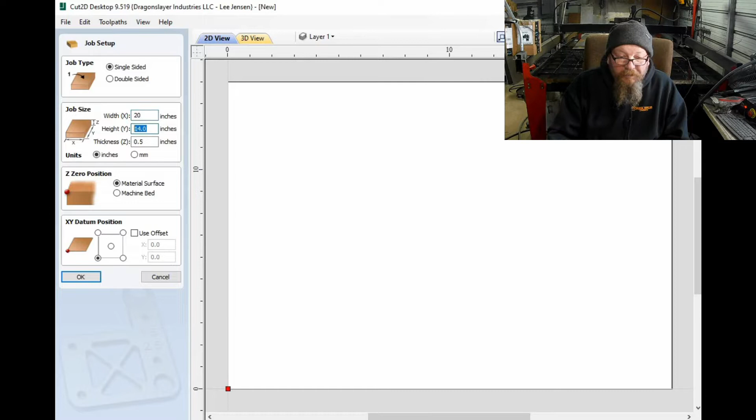What I'm going to do, we're going to make our layout just a 20 by 20, and our piece probably isn't going to be near that big, but what that does is that makes the center 10 and 10, which makes it real easy.

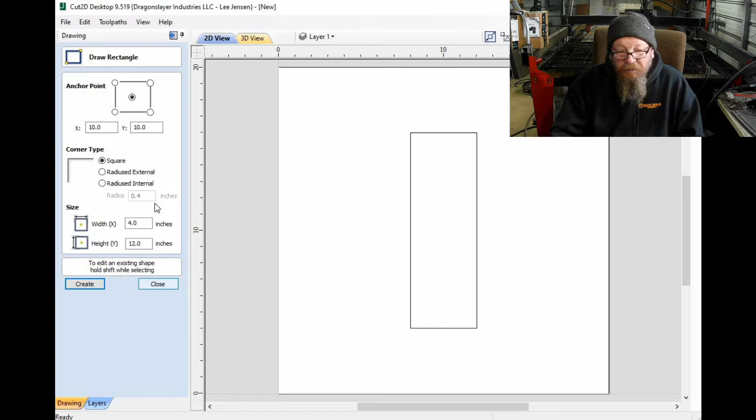So I know my piece of plexiglass is only about 4 inches wide at the widest part, and what I did there is I'm centering this rectangle up, so I'm going to make the width of the rectangle 4 inches wide. The plexiglass is 12 inches long about. It's got some stuff on it that needs to be cut off. So we're going to start with that rectangle right there in the middle.

And then we will find us some text, I want just a pretty basic text, maybe just an Arial. I'm going to go with Arial Black.

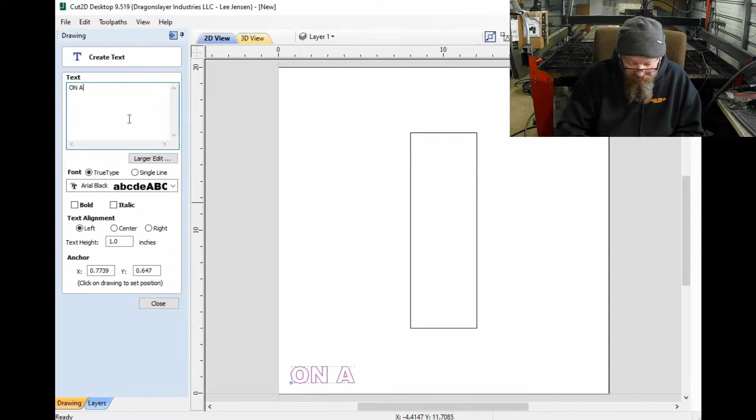So here we go again, just get that text out of there. So, yeah.

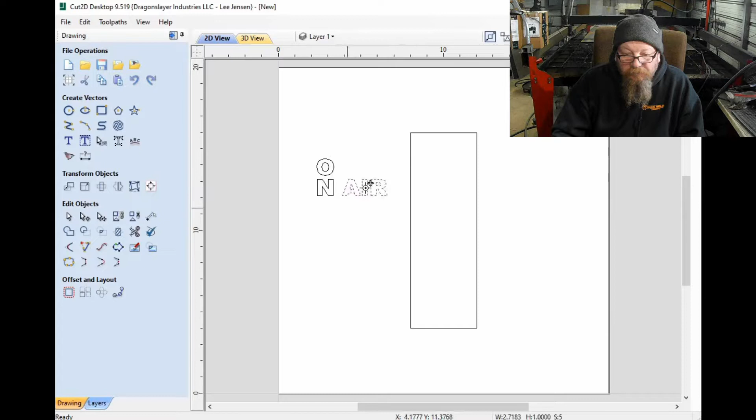Turn the text into a vector so that we can deal with it a little easier. Just trying to snap to the center there.

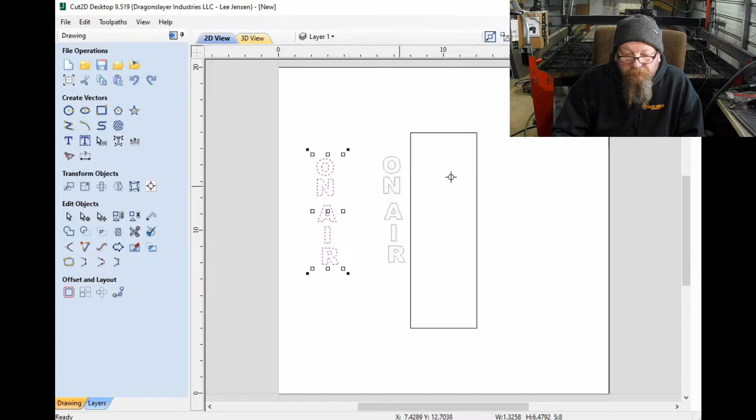And there may be some kind of lineup, something on here. More similar to Inkscape, but I don't know.

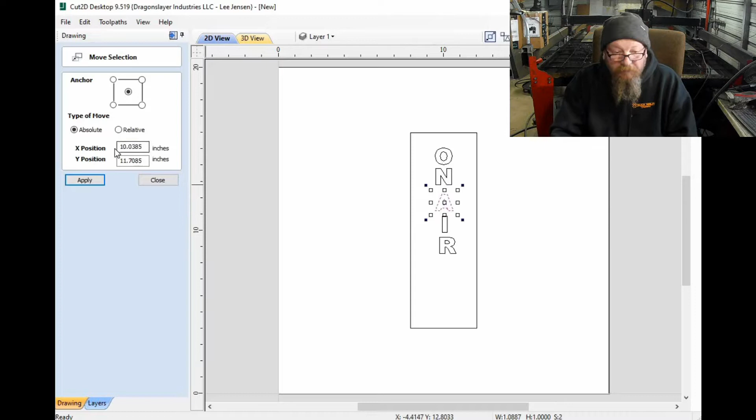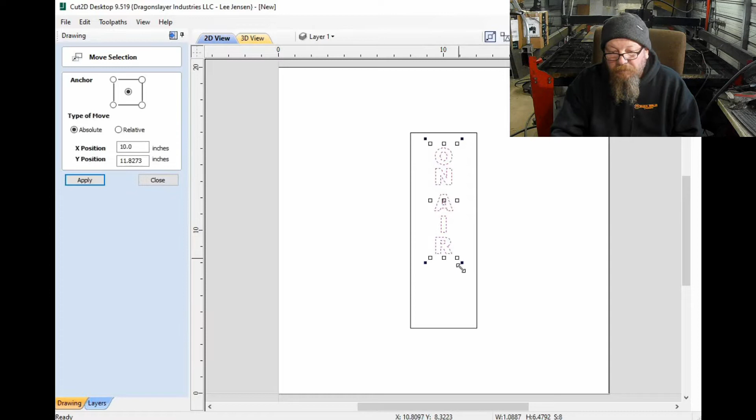Just centering them all up at 10. We'll make it all a little bigger. I like that a little better. Move it all back over to 10.

This is only going to make it smaller one way. We're almost dead center top to bottom, but we'll fix that.

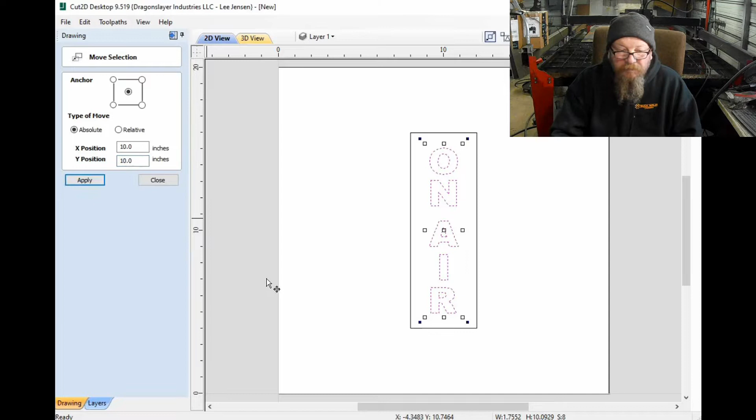Okay, so I like that. Actually, I want to move this up just so there's a little more definition between 'on' and 'air'.

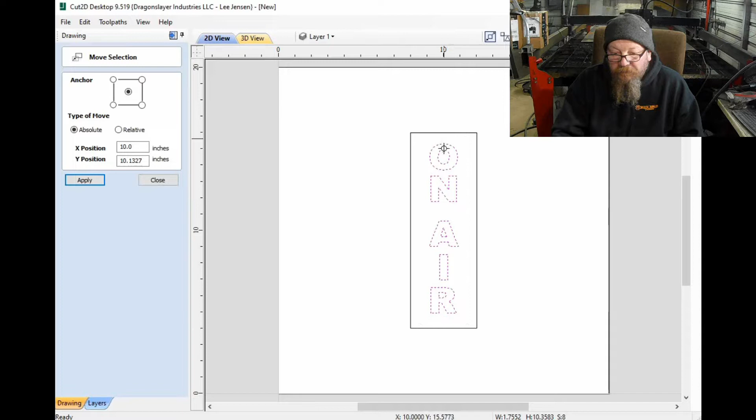Back down 10. So we're 10 and 10, we're perfectly centered. Now we gotta make sure the centers of this stuff doesn't fall out.

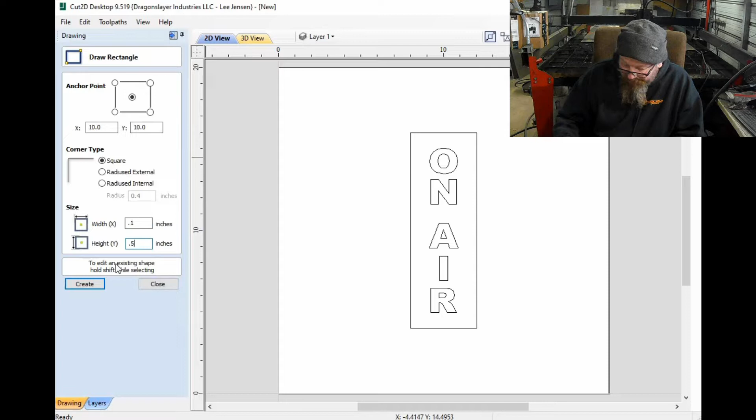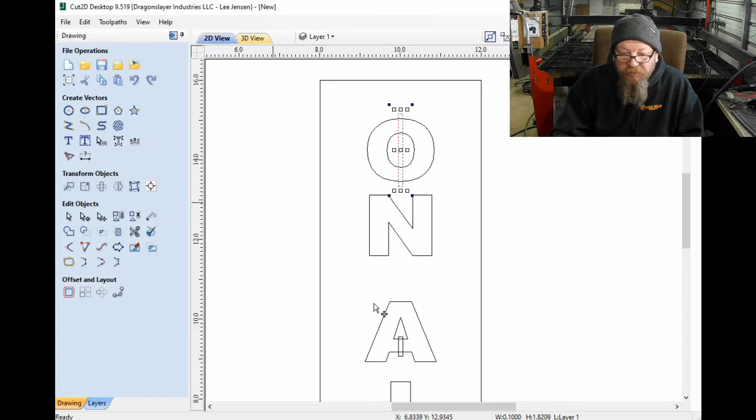So we're gonna tag a few of these drops in. What I'm doing is making sure that the center, we have to tag it in, bridge it across. And that one's fine there.

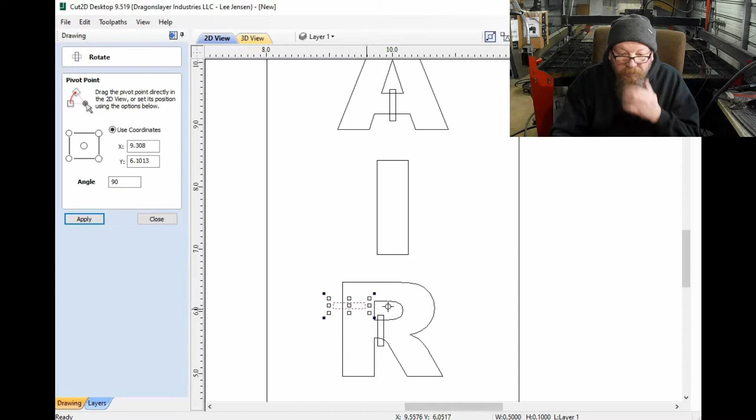So we'll go up here in a minute. Try not to use the keyboard shortcuts because you can't see those. Stuff will just start happening.

So we're going to center this up. Select our one that we want to move first. Okay. We're going to center this one up to that.

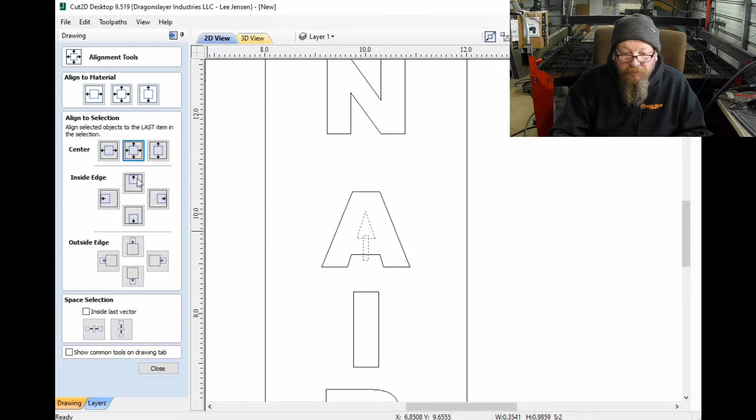Side to side. We're going to center this square to there. Center this one to the top. Okay. Now we'll come back and cut all these out.

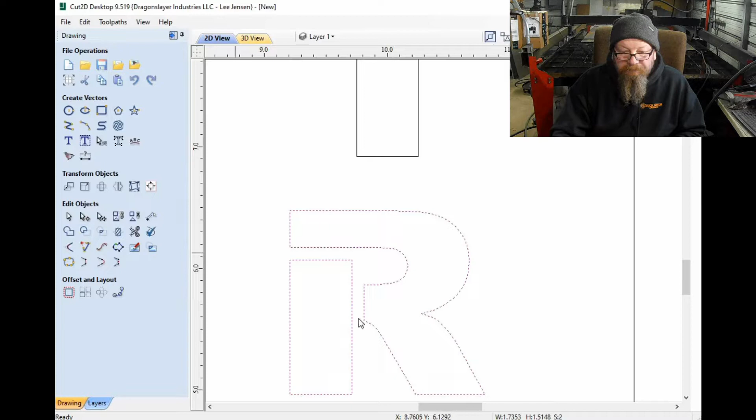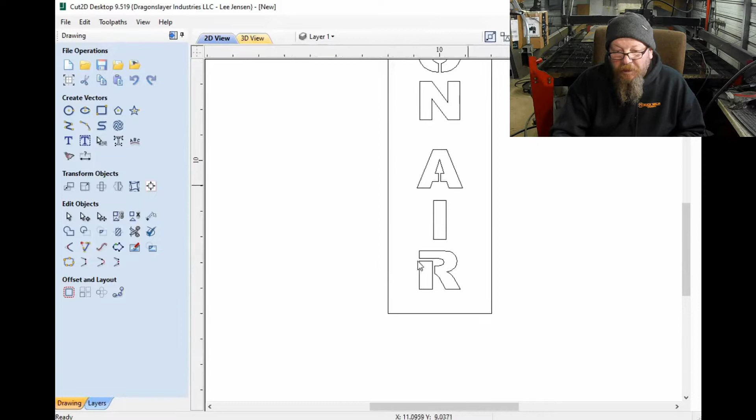So now when we cut that, those center pieces won't fall out because the letters themselves are going to be open.

Now the next thing is I'm going to make this where I can just fold it. So we're going to add this onto here. Let me scoot that over, and want to do this, and we want to do this to make sure it's even. There's different ways of doing this stuff. I'll flip that over.

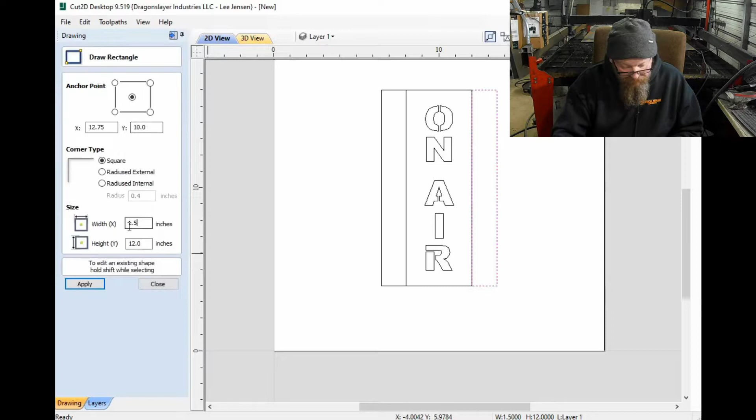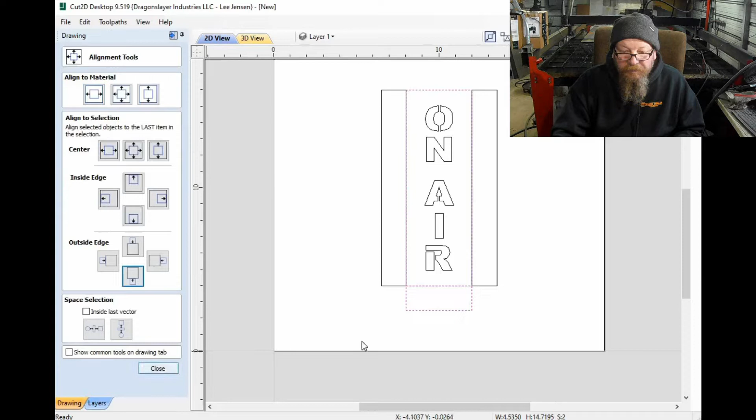We'll make another one that is 4 by 1.5. Going to center that side to side. We're going to bring it up to the bottom. Close that. And then we'll just make a mirror. We'll go vertical on that. So now that's going to give us pieces that we can fold over.

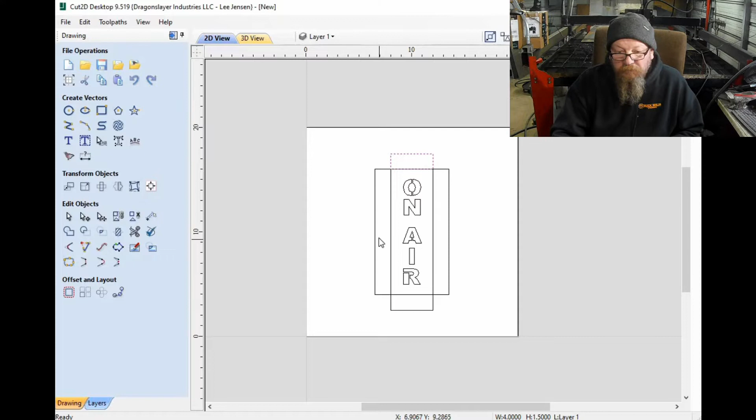And we'll make a back. I want light to go through the back, so I'm going to make the back smaller where there's an edge around it. And we'll do that. I have to connect these, but I also want to leave some creases, some lines in here so that it's easy to bend.

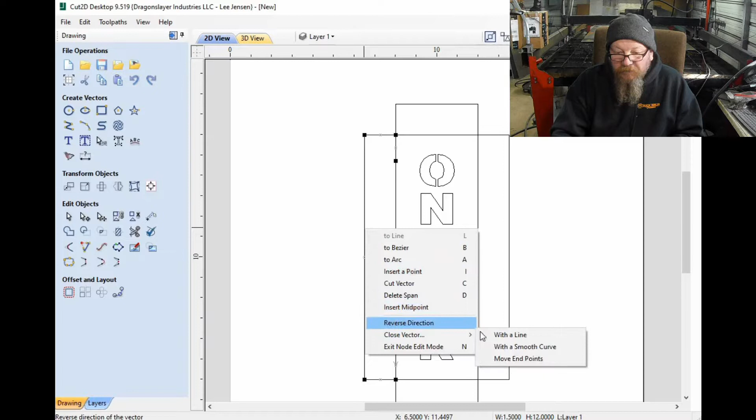And how I'm going to do that is just cut a piece out, and then I'm going to go back in and close the vector up. It's a matter of the way it got selected. So anyway, that gives us these little lines to bend on. Let's center those up right quick.

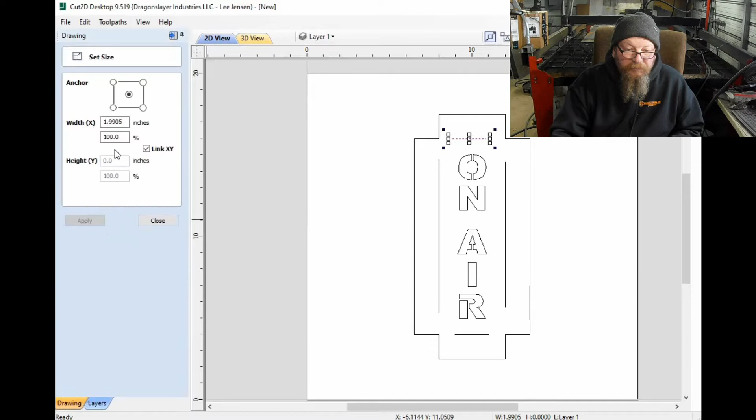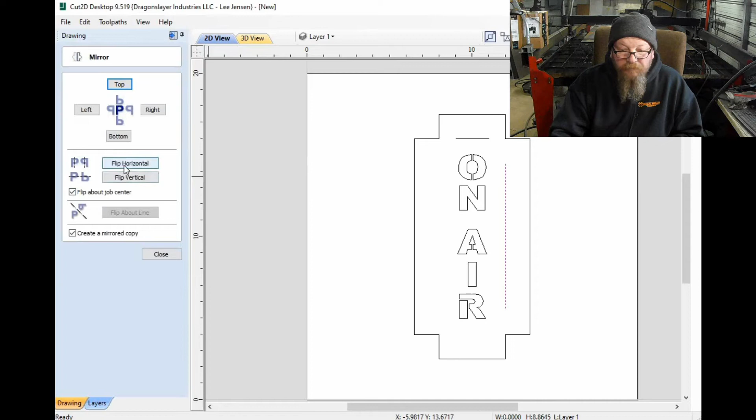And you know what I'm going to do actually to make them exactly the same? I'm going to flip that horizontal over the center. I'm going to flip this one vertical. And now all those are the same. So now we got our little box made.

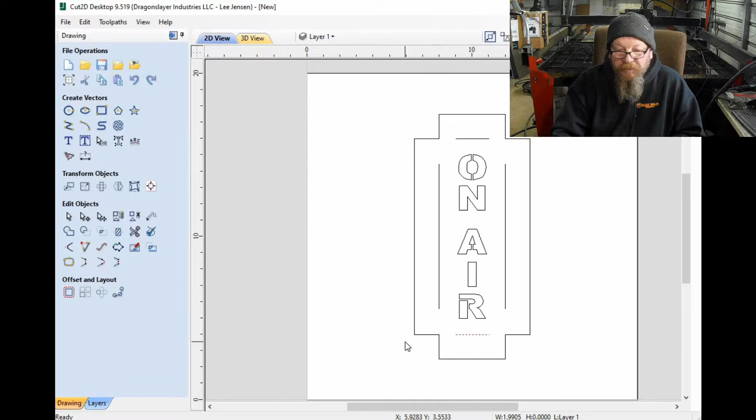And that's 4 by 12. I think I want to leave about a 1/4 inch around. So I'm going to make another one that's a 1/2 inch. Should be 3.5 and 11.5, and we're going to go, we'll move it over here quite a bit. I don't know exactly where that's going to be, but

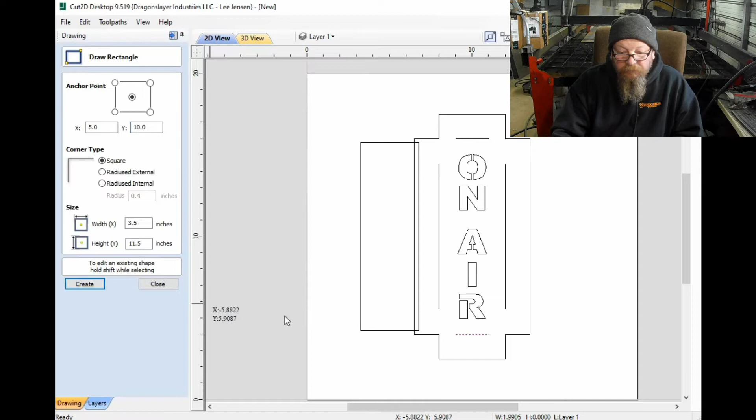So that's going to fit inside here on the back. And what I'm going to do, I'll move that. Okay, right.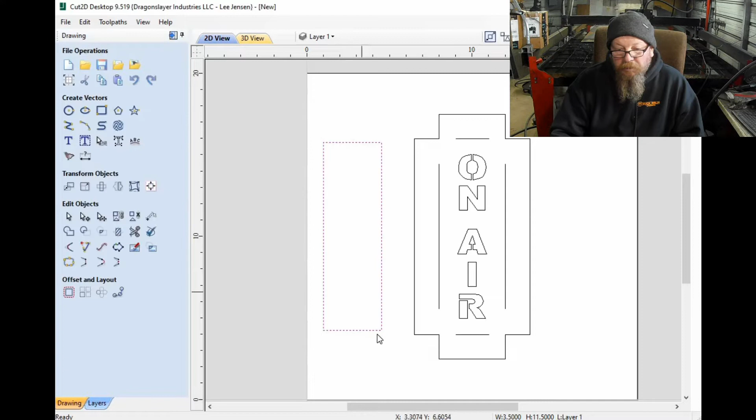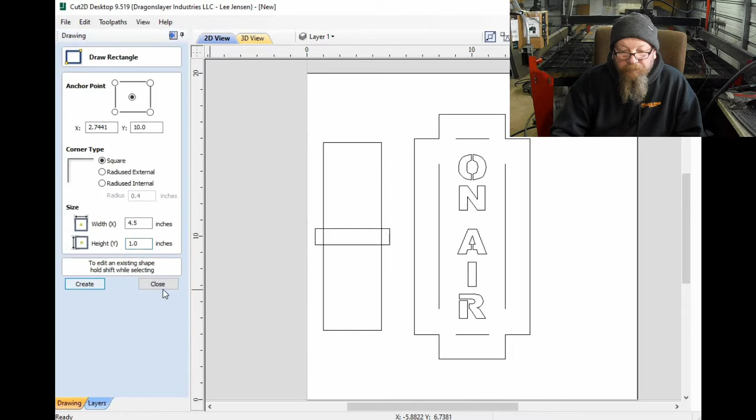I'm going to make another square, and we're going to go, let's go 4.5, and we're going to go, but it's only going to be 1.0 inches tall. Okay, can't do that. Got to deselect that first. Okay, well that centered it up right there for us.

And those tabs are going to fit through some slots that we make here. And we will make those, I think our piece is about 70 thousandths, our thickness of our stuff's about 70 thousandths.

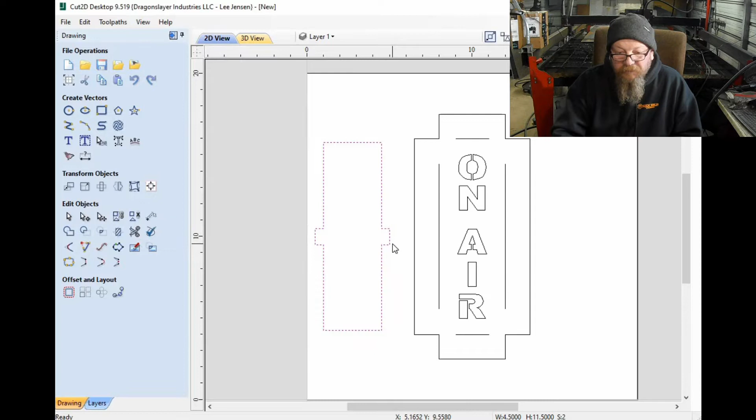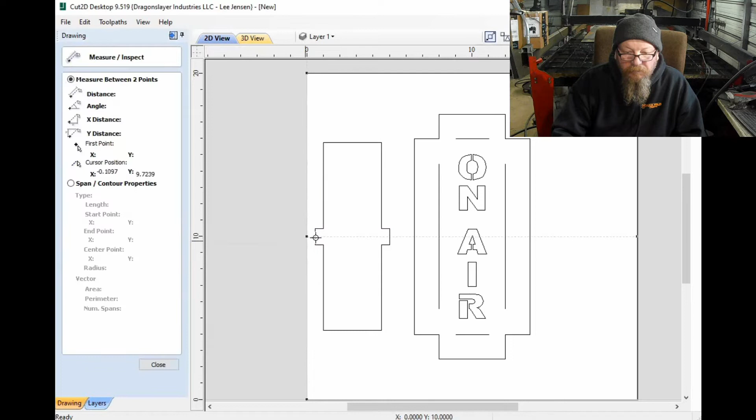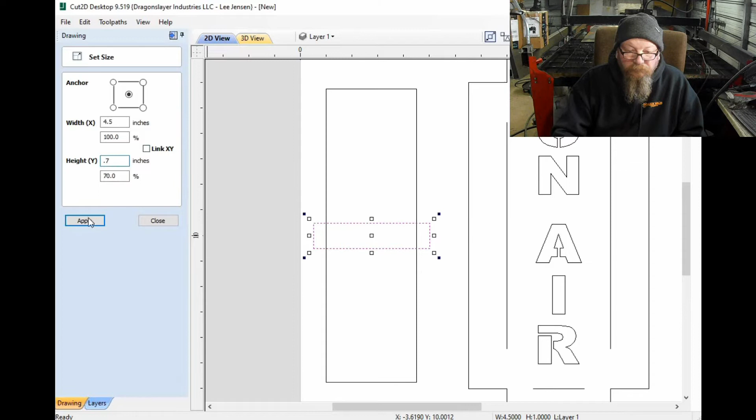So we're going to make the height, we're going to do, yeah. How high did I make these? I made that an inch. Let's go back. I don't want to do near that. Alright. Make that just under 3/4 of an inch.

So now we're going to come back over here and we're going to do a 0.1, 100 thousandths, because we're about 70 thousandths. We want some clearance on there. Let's say that's double. Let's go 120 thousandths. And the height, we're going to do other one's 0.7, we're going to do 0.8.

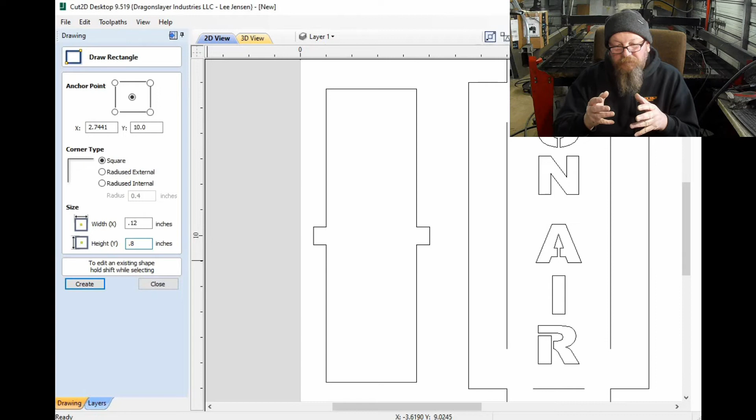Okay, and that's going to be a little bit sloppy in there, but it's like it's going to fit, so it's going to make it all right. Now, so that is right in the center, and we'll check that as it goes over. It's going to be a little bigger, right? And we're going to put that just inside of there.

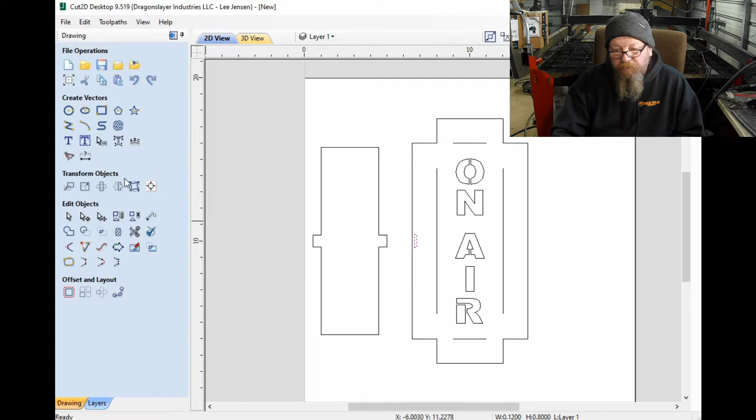Okay, and then I'm going to take that, flip that horizontal. Now the last thing I want to do is make some little tabs on the side to hold the plexiglass to the front. So I'm just going to make a little square, I want to make it a quarter, maybe 3/16.

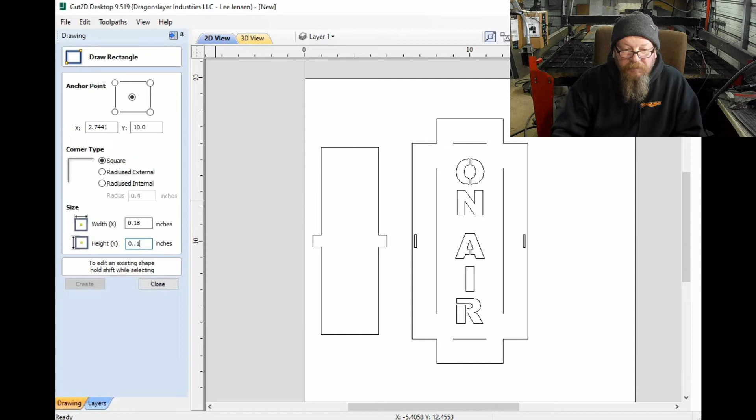0.18 by 0.18. God, we got too many decimal points in there. Okay, so we're going to come over here. I'm just going to kind of put it random right there to start with.

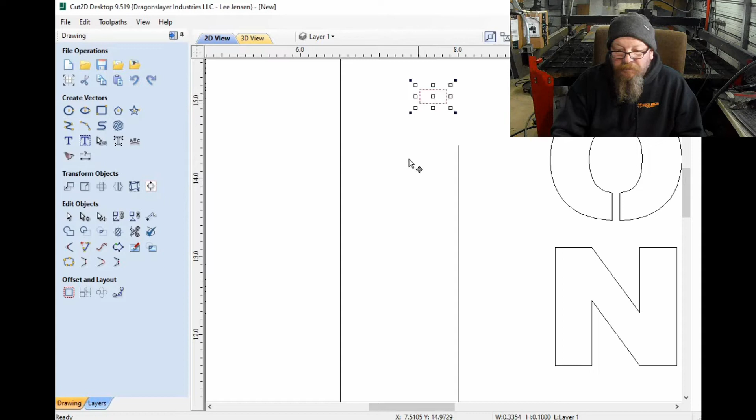I'm actually going to put it up here where it's a little more structurally sound, I guess. Doesn't hurt for this to be a little bit longer. You'll see what I'm doing here in a minute. So this is what I'm going to do here. Properties.

We're on 8 inches, so I think that stuff's about an 1/8 inch thick. So yeah, we're pretty close. 7, 8, 9. That's fine, and it'll bend over it.

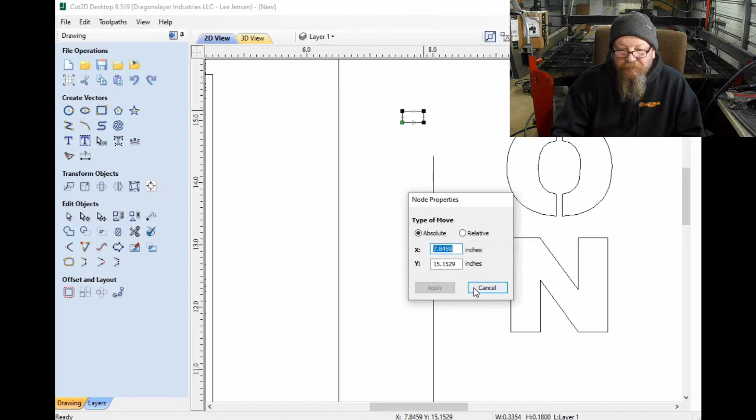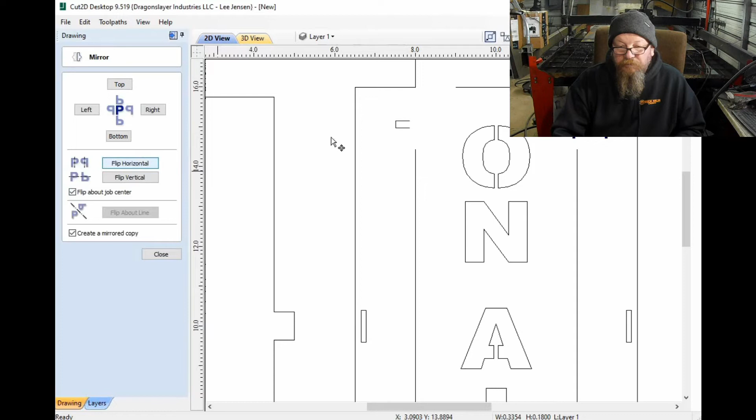Now what we're going to do is take this centerpiece out, and then we will distribute these around so that we have 4 of those, and those are gonna be tabs that we just bend behind the glass and they hold it in. Lastly, I could weld a little piece on the top of this, but I kind of think it's cool that light's gonna shine out of it in different places.

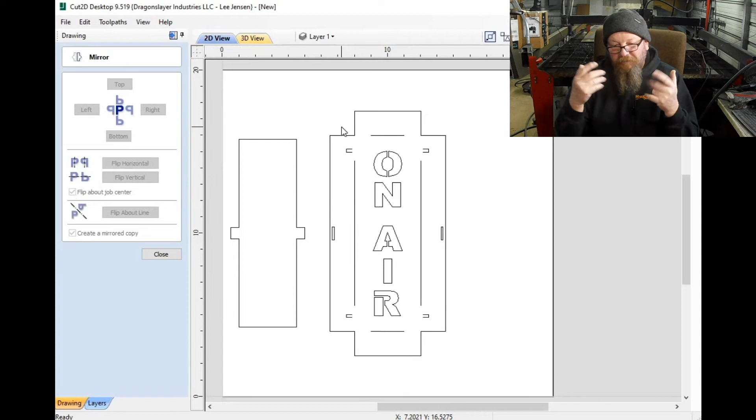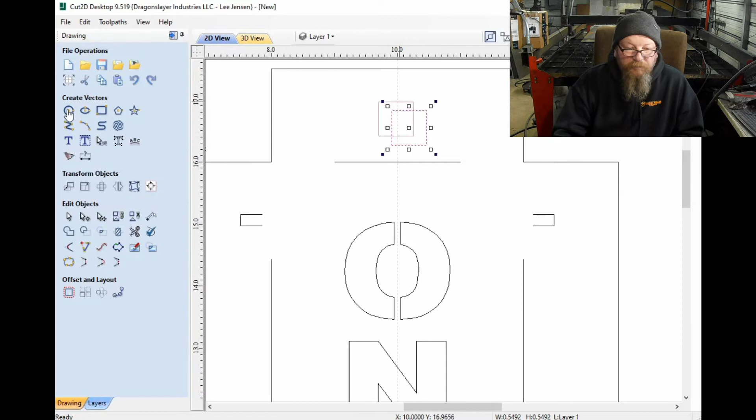So lastly, we are going to make us a little tab right up in the, kind of similar to what we just did. Let's put a little hole here. I don't know about how big my little bolt holes are.

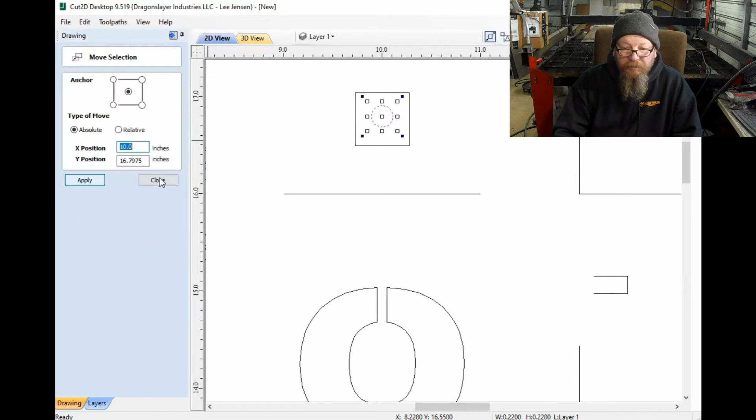Go straight up, just check it, make sure, yep, we're at 10 on that. We're pretty darn close on that. We'll round our corners up a little bit.

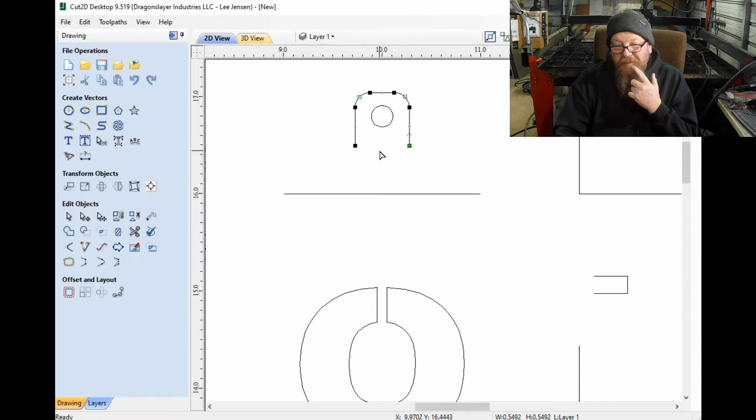Close that. I'm going to hit the D button. It's going to delete that out of there. So that'll get cut. We'll flip that up. And that's going to be what we hang it from, with some little piece of wire or something.

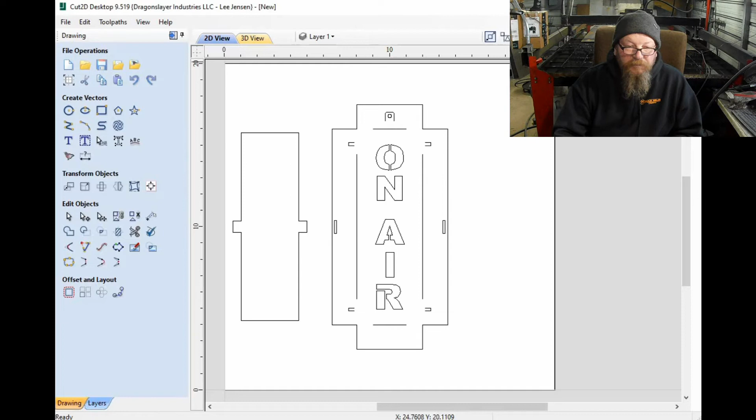So this has a check over here. We can look, there's no real problems there. And while this is screen recording, I guess we'll set, let's see, save this to my stuff. Save here.

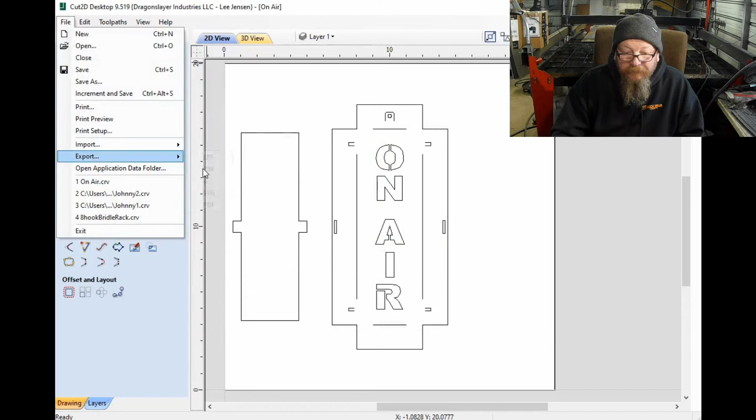On air. Caps lock - my superpower is typing out sentences with a caps lock on and having to redo it. We are going to export that to a DXF. So out of my stuff. And then we're going to click out of here.

I'm going to open SheetCam. My stuff. There.

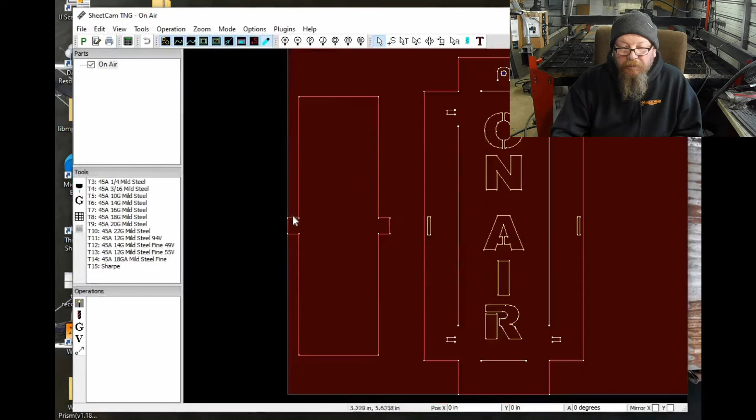Okay, now the last thing I'm going to do here is break up the manually nested, and what that does is it just puts it into two pieces so that I can move this around. We're gonna put it over on the edge.

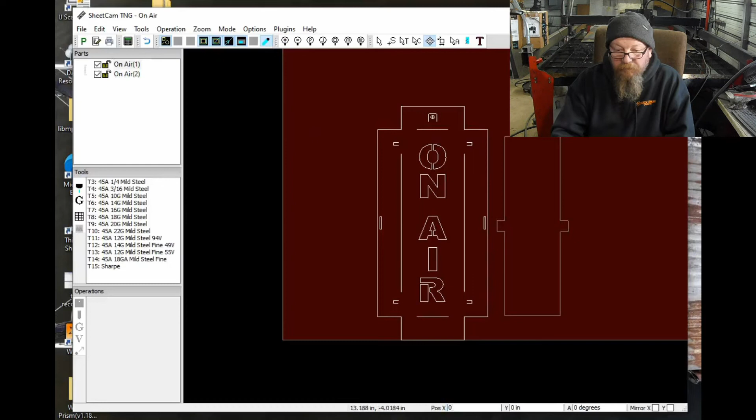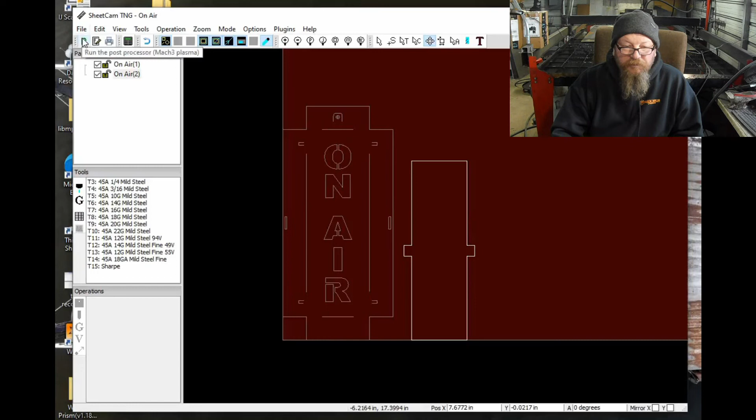Let's get this close down here. All right, so I know that it may not even be the exact, but here's the thing. I know the 14 gauge steel setting will cut the aluminum just fine.

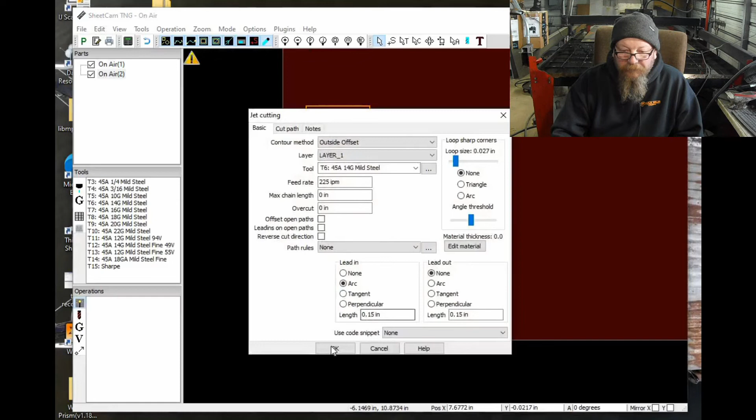So we're going to set that. Tool path on it, all that. Looks good. Outside offsets. You know what doesn't look good? I don't know why.

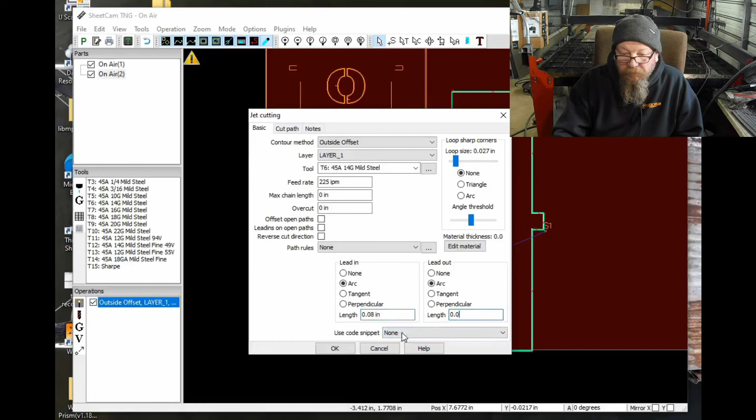We're just going to go 0.08 on there. There it goes again with too many. No, I don't like that either. About a 0.01, 10 thousandths.

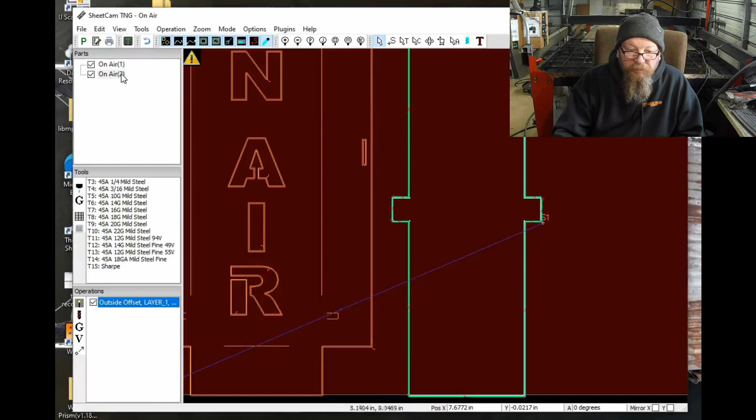Okay, we're going to come over here, do the same thing. I'm not exactly sure why I had those off. Surely some great reason, right?

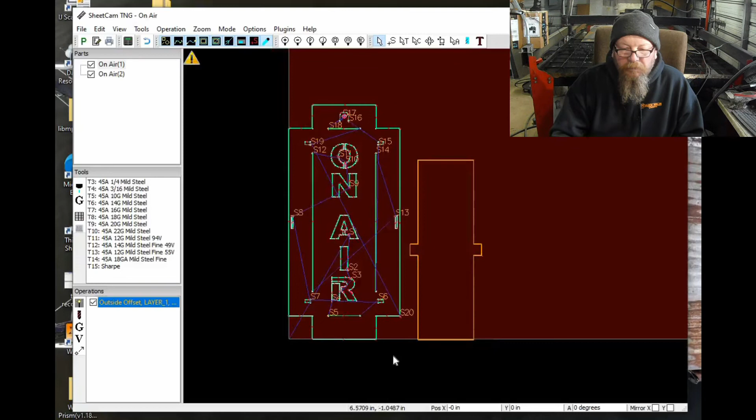So I'm gonna reach over out of the computer and get that. And we are gonna save the job on air to USB. Boom. Okay, now that moves to the other computer, so I'm gonna shut this screen record off, and the other camera's set up for that.

So now real quick, we're just going to put this in here. And job - we're going to find me on air. Okay. This.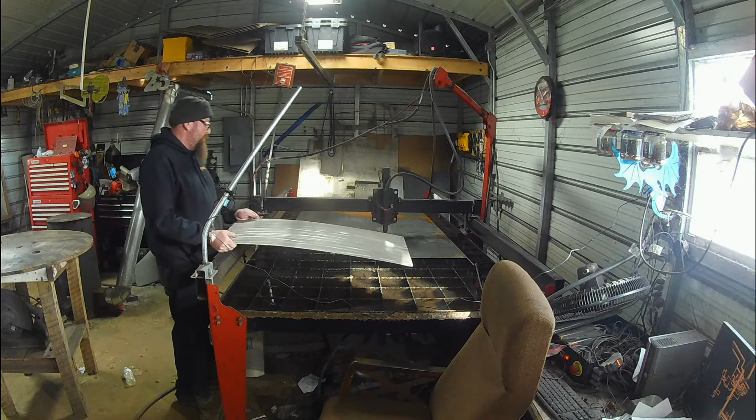So this is a scrap piece that was left over. We made it, it went on the back of a trophy I made, and then we made a bigger one in place of one of the mini ones I made. So that one right there, that's scraps.

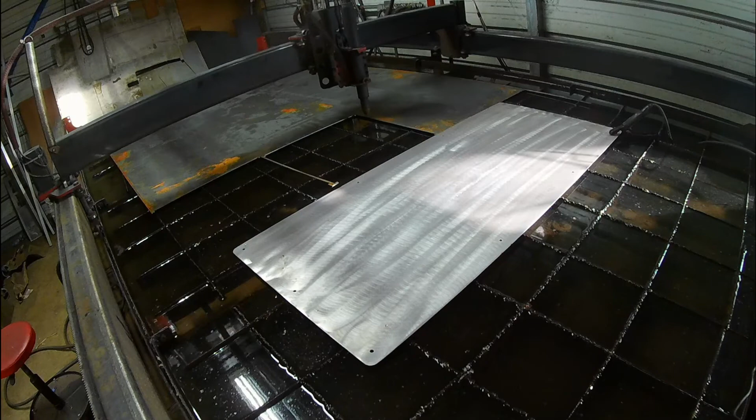Find our 0 on here. Make sure we stay inside those holes a little bit. Zero everything out. Hit go.